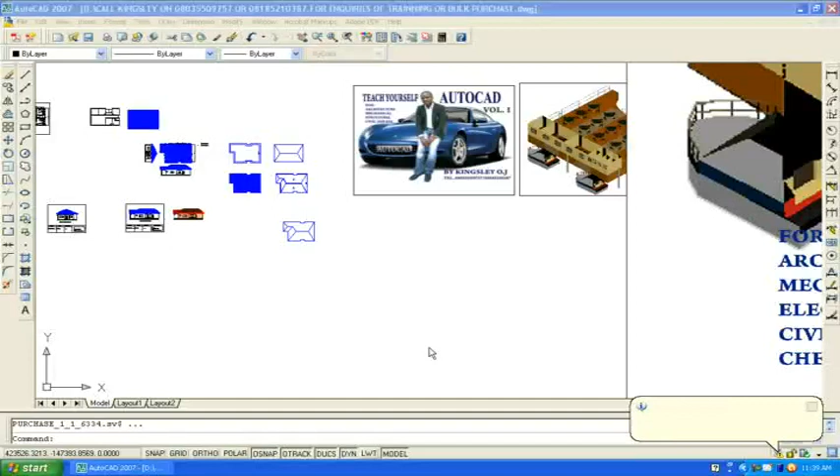Now printing in AutoCAD. Let's go back to our drawing.

It's very, very simple. First, let me change the background color to black so you don't get confused. I'll change it back to black. Select white. Okay. I'll say apply and close. Then I'll say okay.

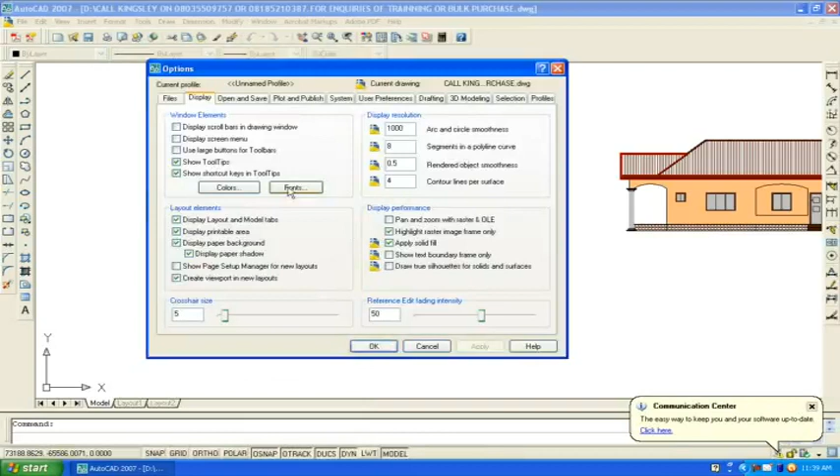Sorry, let's come again. Color. I didn't select black, thought I did, but black is there now. I'll apply and close, so I have my black now. Apply and say okay.

Now it's not like because this place is black we cannot print from this point. If I want to print, I can decide to print from here, or I can decide to go to layout. These are the two ways to print.

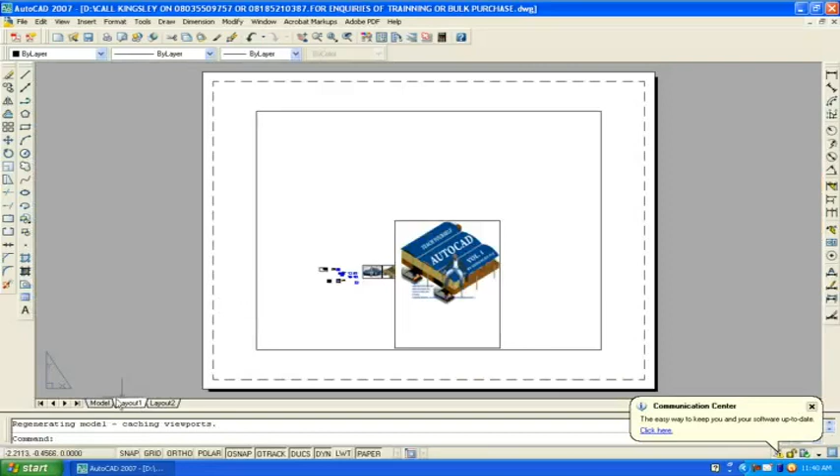If you want to print from model view, if I prefer to print from model view, the reason why I have to go to layout to print is maybe because I'm sending the drawing to somebody who is not close to me. Alright, if I want to print right away, I don't have time going to layout to start arranging.

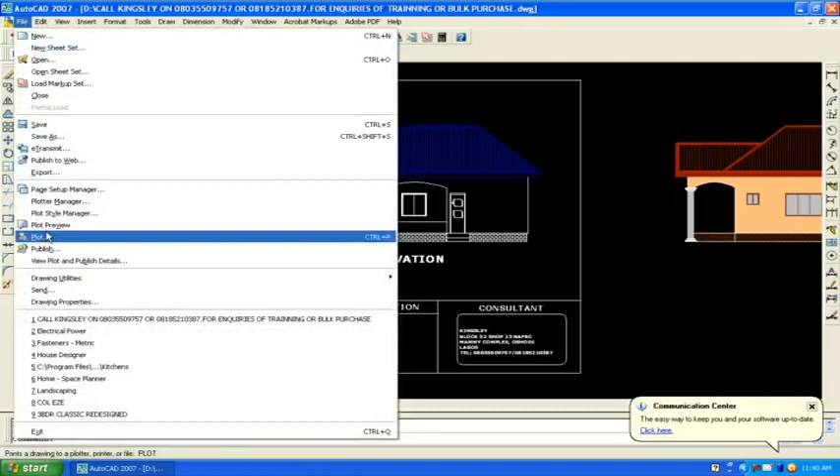Okay, let's start with printing in model view. Now I'll go to file, then go to plot, or press Ctrl P on your keyboard. Plot.

When I click on plot, it will boot and bring out the Plot - Model there. So I'll select the name of printer or plotter. This is my printer, I'll select this. This printer prints only on A4 and below.

Now select the paper size A4. Now I'll say I want it to fit to the paper. The number of copies is just 1.

This time I'm not printing to scale. I just want to print and make it expand on the paper. I'll still show you how to print with scale if you want to print with scale. That is how you want it to be exactly - when you measure it with a ruler on paper, that's how it's going to look like. At times when you want to print with scale, you might not enjoy the output.

I'll say center the plot. Now I will come to what to plot. Instead of display, I'll come to select window.

By the time I click on window, it will bring me to this point whereby it will tell me specify first corner. I'll click on this point as my first corner. It immediately asks me on my command line to specify opposite corner. I'll come to the alternate corner and click. Once I click, it will take me back to this point.

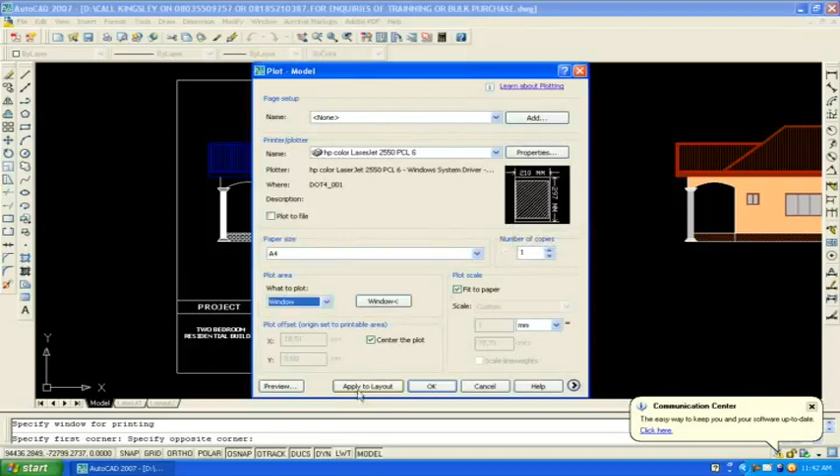So this is the preview of the drawing, how it's going to look like when I eventually print it. I'll say apply to layout. When I preview, I'll see how my drawing is going to look like when I print it.

If I want to print, I'll right click and just click on plot straight. It will boot to print, but still this message will still come because I don't have my printer installed. Okay, if I had my printer installed, it will print out for me. This is one way to print.

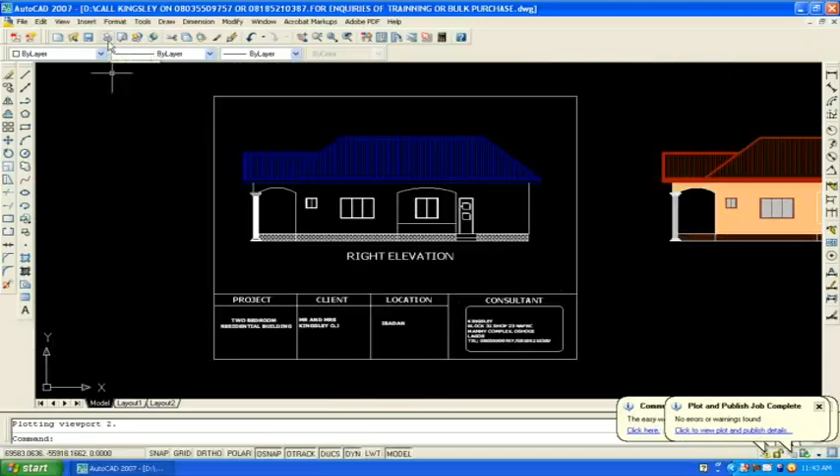I come again. I can come through this point, plot, and I click on it. It will take me to the same place.

Now, window, after selecting my printer. Okay, let's assume I have a bigger printer that prints A3. Now there's a system default which AutoCAD installs for you, especially for you that is learning. To tell me the paper size in the layout is not supported by that, I'll say okay.

Let me check the ranges of paper that this printer can print. So a small paper that it can print - I don't want this. I'll go to, let me look for a larger printer, a larger default printer. Usually AutoCAD comes with a default printer which can print a large document.

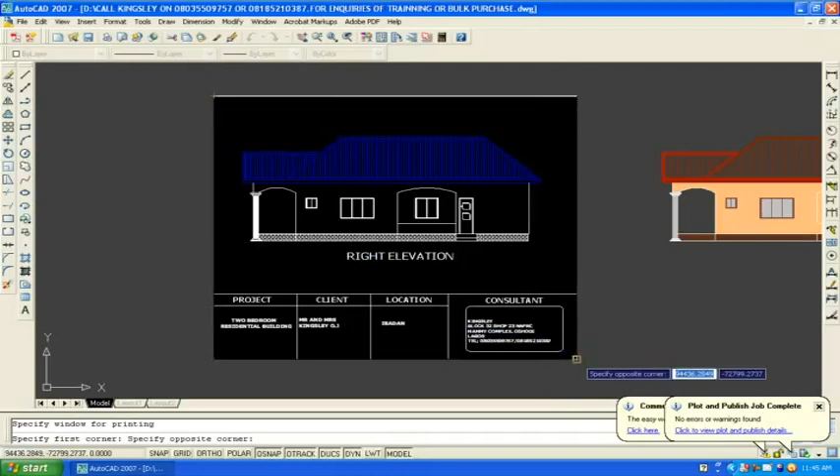Okay, I'll say I want it to fit to paper, center the plot. I'll select it. Now I'll say window, first point, second point, apply to layout. Let me preview and see.

So it's still the same way it's going to show. It's going to expand the drawing to fit into the A3 paper. This time, instead of printing, I don't want to print. I'll just exit.

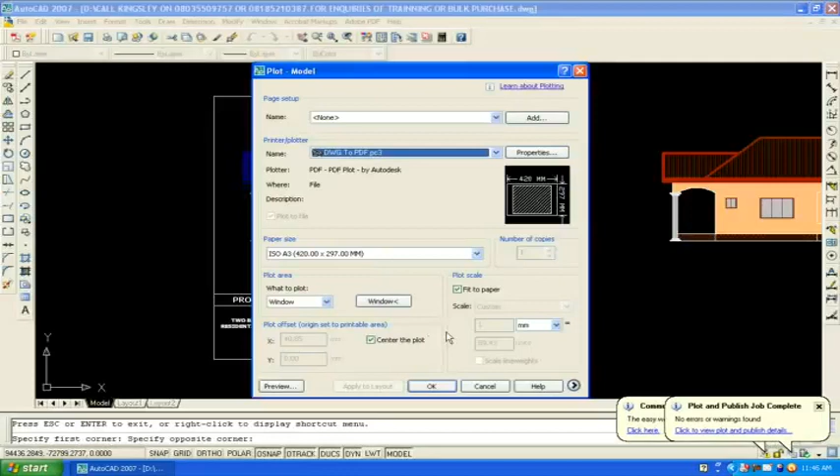Okay, to take me there, I'll say cancel. I don't want to print. Okay, so that's one way to print. That's making use of the model view to print.

I can decide to print from my layout. To print a layout is also very, very simple. I'll go and arrange the drawing. Okay, what I'll do is this.

I'll click on this border, try to expand it. Now when you go to layout, it's everything that will show. I'll expand it, just in case you're sending the drawing on the internet to somebody that will do the printing.

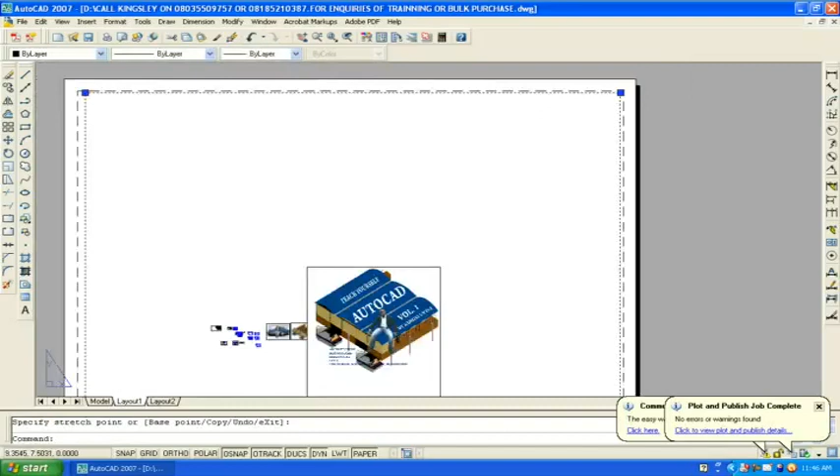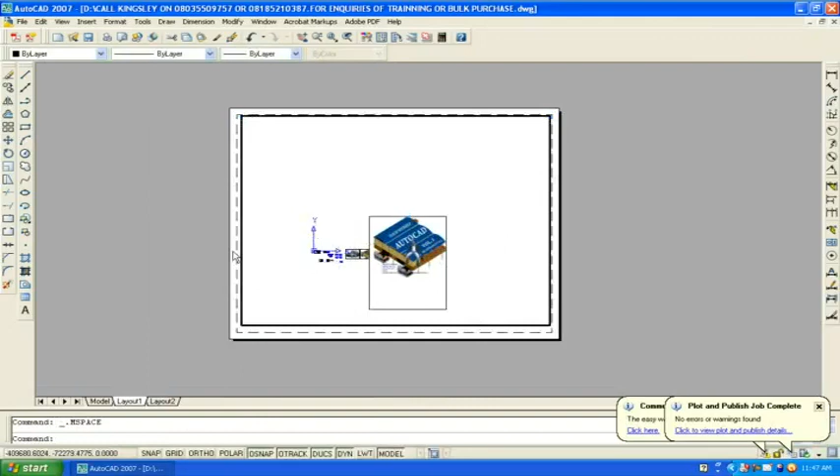Now I will double click inside. Now as I'm zooming, you find out that the drawing remains constant while the paper shrinks and increases. So this time, but when I double click inside, the borderline becomes thick. When I double click outside, the borderline becomes faint, so that I can carry it.

Let me double click inside. So, but for you to double click inside, make sure you're seeing the whole paper. If not, you can run into trouble of losing your drawing in this layout.

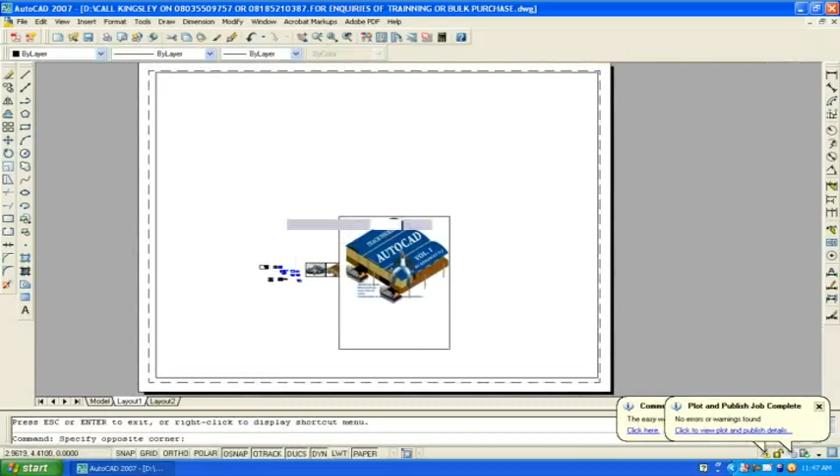So I'll double click inside now. When I double click inside, if I make use of the zoom, find out that the paper remains constant - that's the layout paper - while the drawing increases in magnitude. So I'll make use of this pan. All right, let's make use of window. I want to see only this.

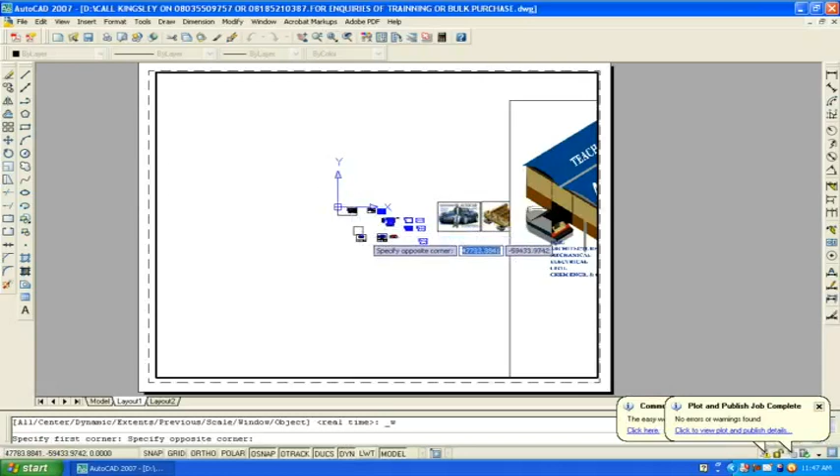In this case, I'll double click outside. If I want to print from this, I don't need this rectangle anymore. See, by the time I double click outside, the paper can increase while the drawing remains.

Drawing cannot move, it's just the paper that will be moving. In order not to have two borderlines, I'll double click inside, select this one, the initial borderline, and erase it. Then I'll come to extend, and try to extend this borderline.

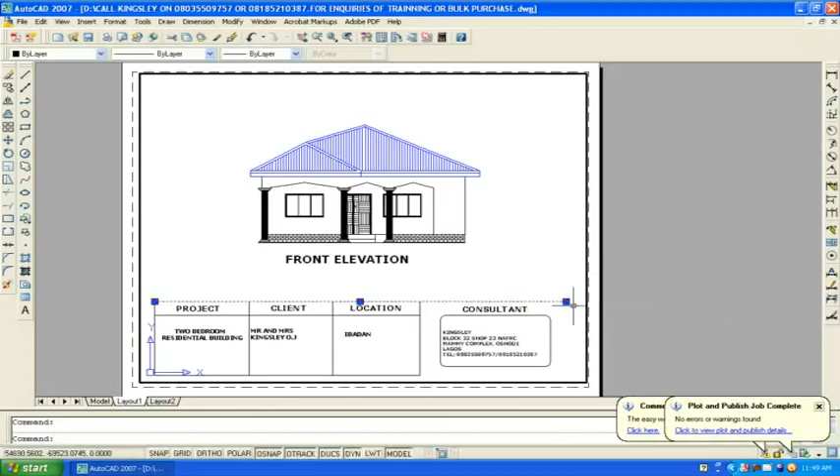Because there's nothing for it to hit here, that's why it's not moving. So I'll just select it and draw it across. Put on my ortho.

Do the same thing here, or leave this side. Now I'll double click outside. I want you to know that you see this border line. Anything outside this dotted line you're seeing will not show, so make sure your borderline is in between.

That way, when you want to print, you just go to print or plot straight. Now select the printer, let's say this, then paper size A4. Now what to print is layout. I'm printing the layout, there's no need saying scale. I'll preview. So this is how it's going to bring it out for me.

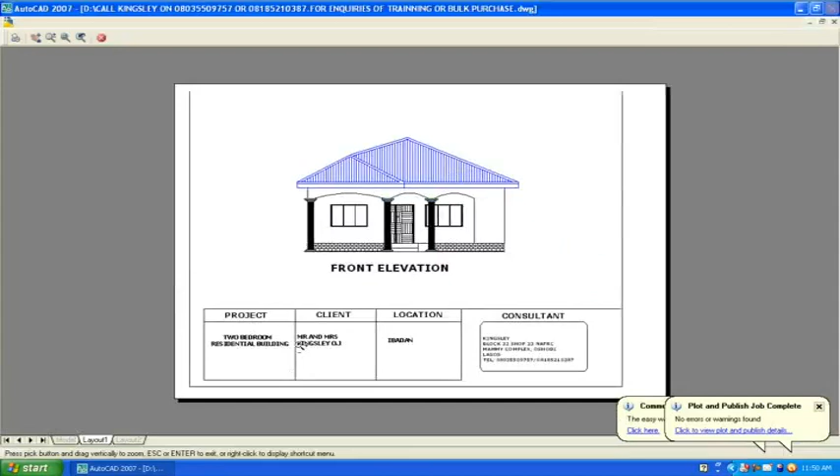But I'm not seeing this upper line. I right click and exit. I come to this point, I can click and bring it down. So let's try it again.

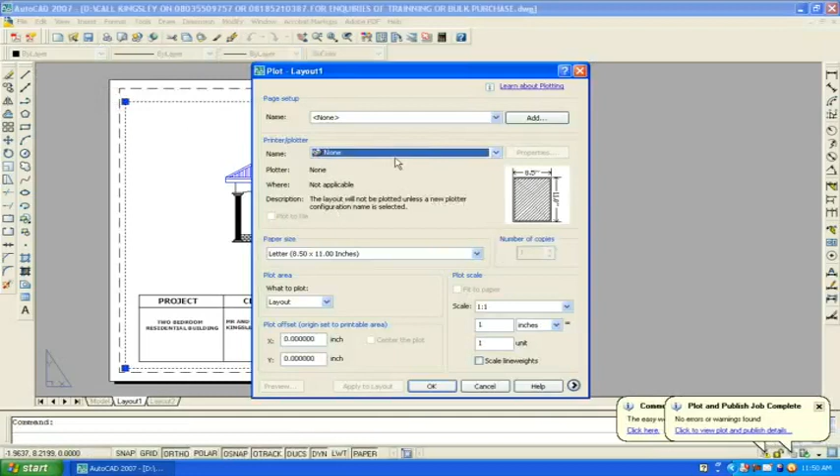Select the printer, print my A4 for me. Layout, apply to layout. See preview. So it's okay like this.

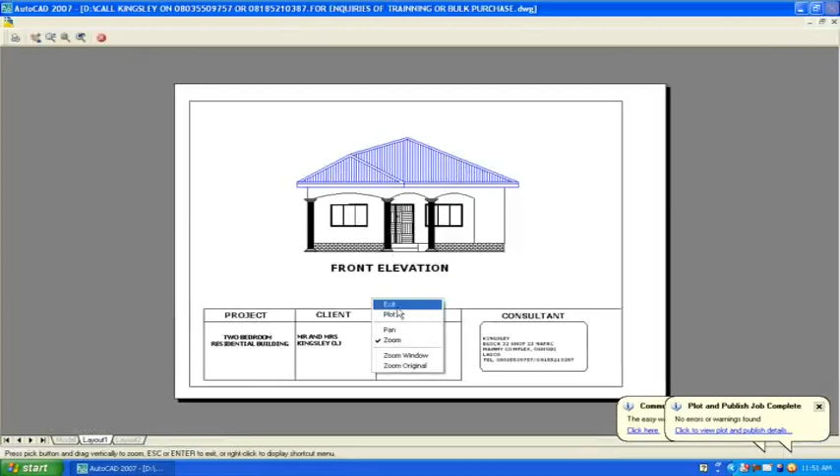But me, usually I don't like to print, so I'll exit because I don't want to print. I can decide to give it a name for the person that wants to print it. The person might be a novice, so by the time I call him on phone, I will say print this layout, print that, print this, okay.

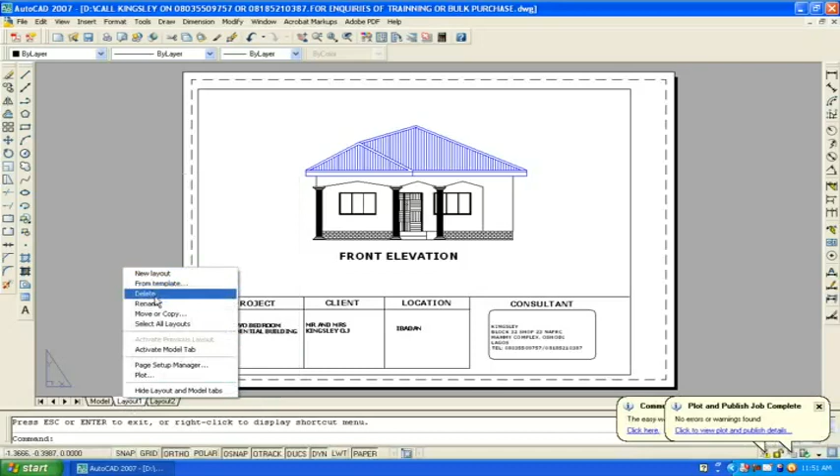I'll right click on the layout, I'll see rename, I'll say front. I'll click on OK.

I'll click on this layout too, it will bring out everything again. So I'll go and rearrange it just like the way I did the first one. That's the same way I'll arrange this. Come down. Go up this time around.

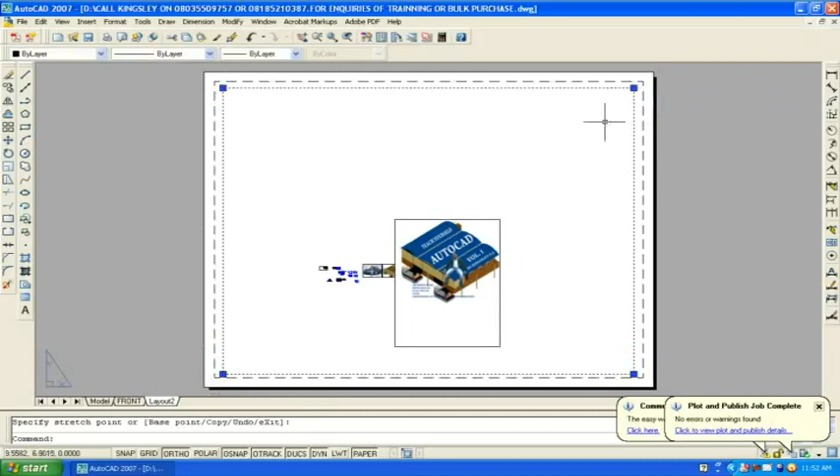Maybe I want to print my picture. Double click inside, make use of this zoom. So if I'm not there, I'll just tell the person to just print everything, print all the old layouts. Double click outside.

Okay, I'll give it a name. Right click, rename. Pics, and say okay. So if I come to this place, I have my front elevation, I have the pics.

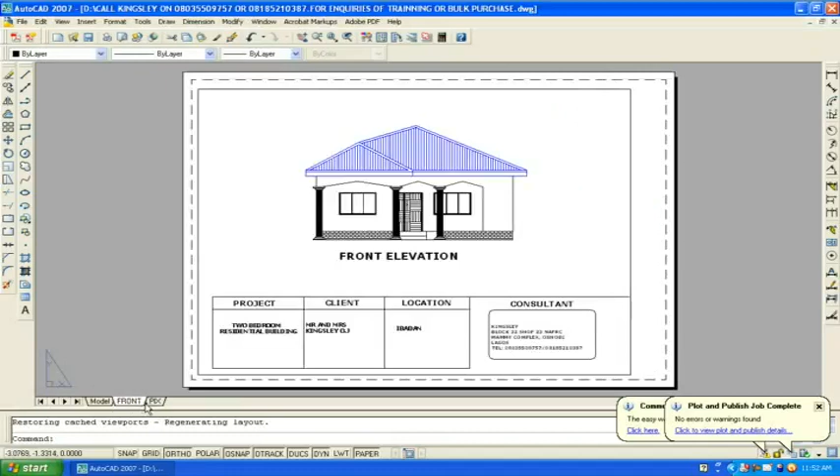I can add another layout. Right click, new layout. Okay, I can give it a name again, I can continue like that. I can have up to like 10 drawings or 10 sheets of drawings I want to print at the same time. I can arrange them.

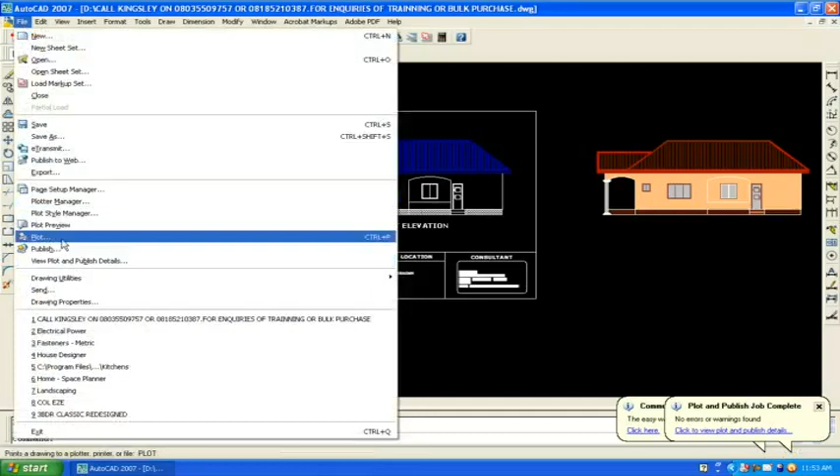So let me go back to model view. Now if you want to print to scale, go to file, plot. This is the printer. You don't have to, but you can use center the plot, don't say fit to paper. You can just come here and say you want to print scale 1:1, but using scale 1:1 it will be too large, that is 1000 being 1000 on paper.

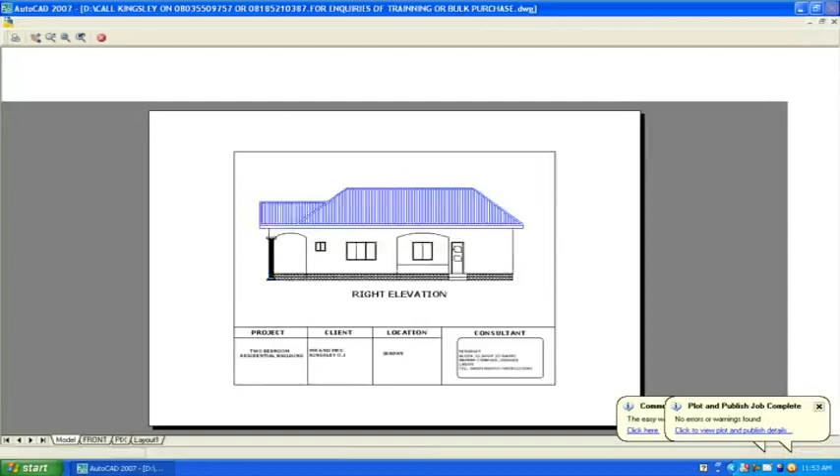The drawing will be too large. Let's use scale 1:100, and let's use A4. Let's see what's up. A4. Apply. If we're using scale 1:100, this is how the drawing is going to look like on A4 paper.

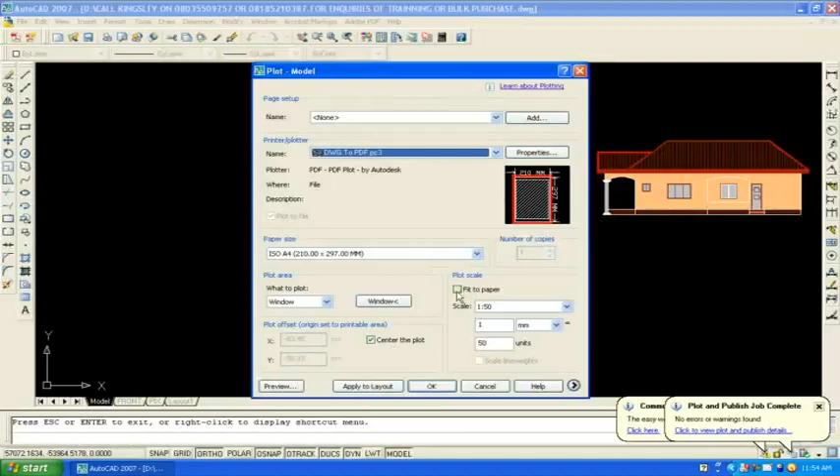So that's how to select your scale. You can select any scale you want. You can use scale 1:50 to be large. Preview. Okay, that's how to print to scale. But usually we print for it to fit the paper.

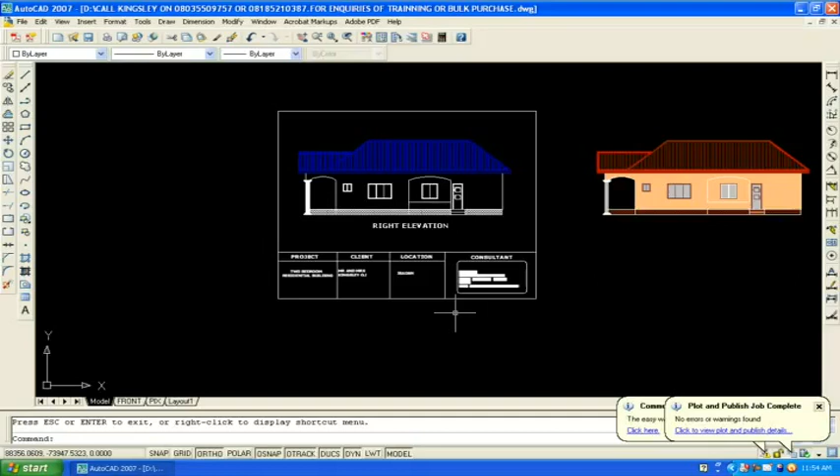So folks, I'll not say this is the end of AutoCAD, but I'll say this is just where it begins. I'm going to be signing out here, hoping you enjoyed teaching yourself AutoCAD. In the next edition, I'll be teaching you 3D, three-dimensional drawing, which you'll be able to draw something like this and many more.

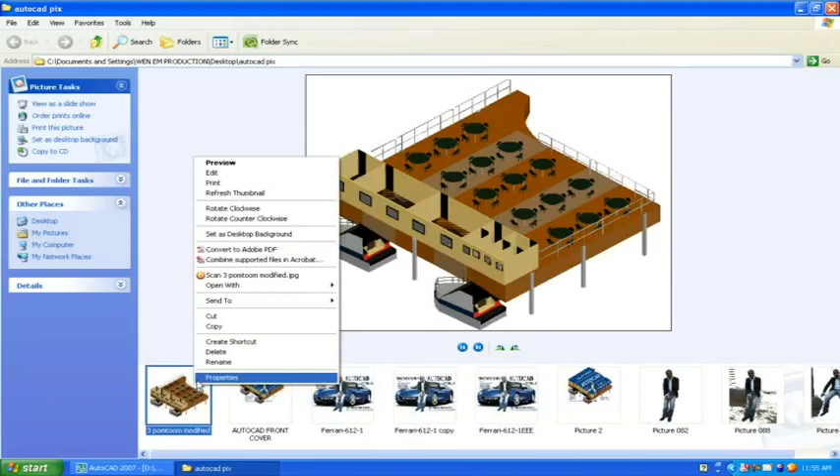Alright, I'll show you this just like I showed you before. I have it here, I've already JPEG'd it. This is the drawing before I did the roofing. Let me preview it so that you see. Okay, this is a boat house.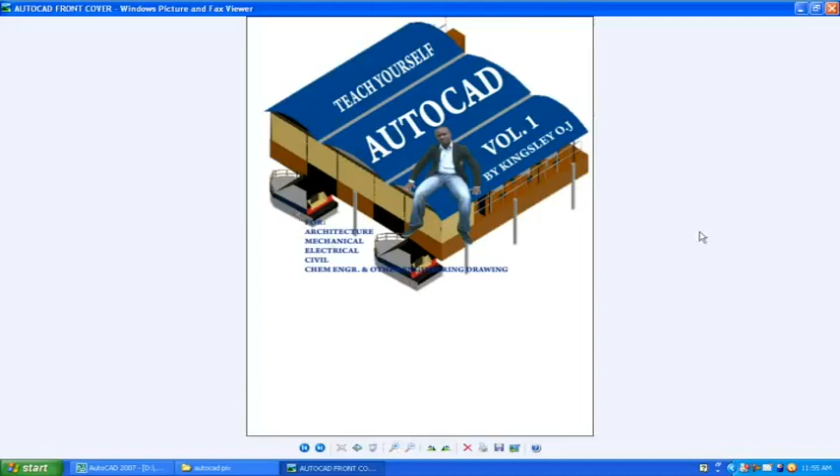This is the drawing after adding the roof. Then I decided to sit on top. Don't ask me how, but the most important thing is that I'm sitting on top. These are two small speedboats beside it. I did it for a company on the island. I like it, to be precise.

So good so far, folks. This is the end of two-dimensional drawing. We'll be coming out with other reviews. For now, it's not easy, you know. I want you to enjoy this.